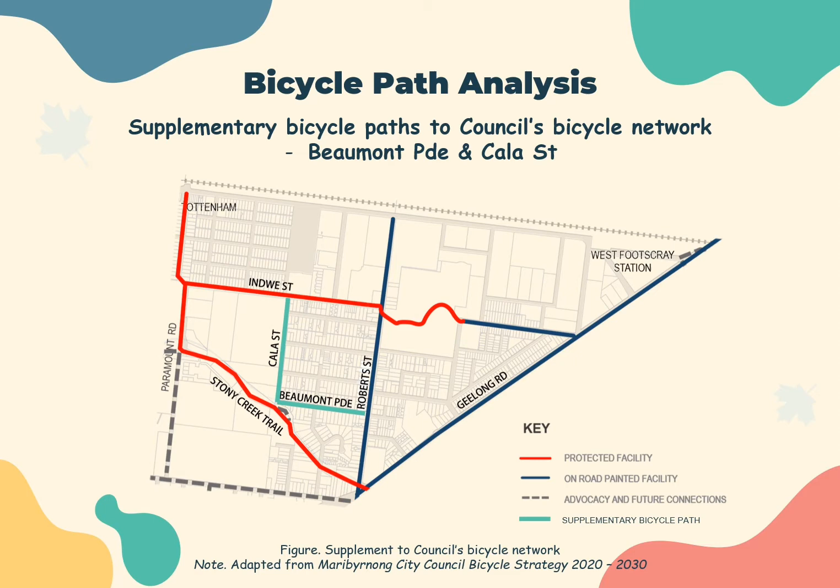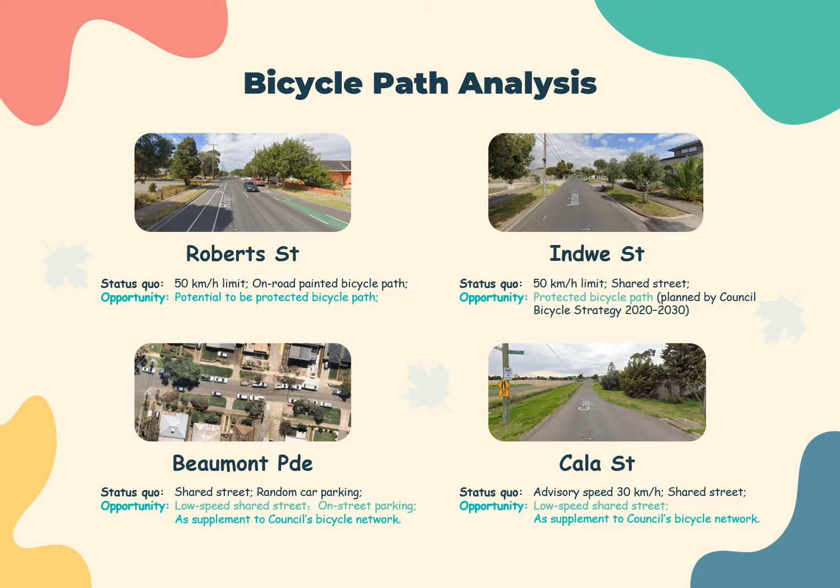This figure presents the Council's bicycle network plan. Since walking is more encouraged on the Stony Creek Trail, we'd like to add 2 bicycle paths, marked as green lines, to the network. Roberts Street and Indwe Street are high speed and high volume, and both can become protected bicycle paths. Beaumont Parade and Cala Street may not be wide enough to set up separate bicycle paths, but can be upgraded to low-speed shared streets as supplementary bicycle paths.

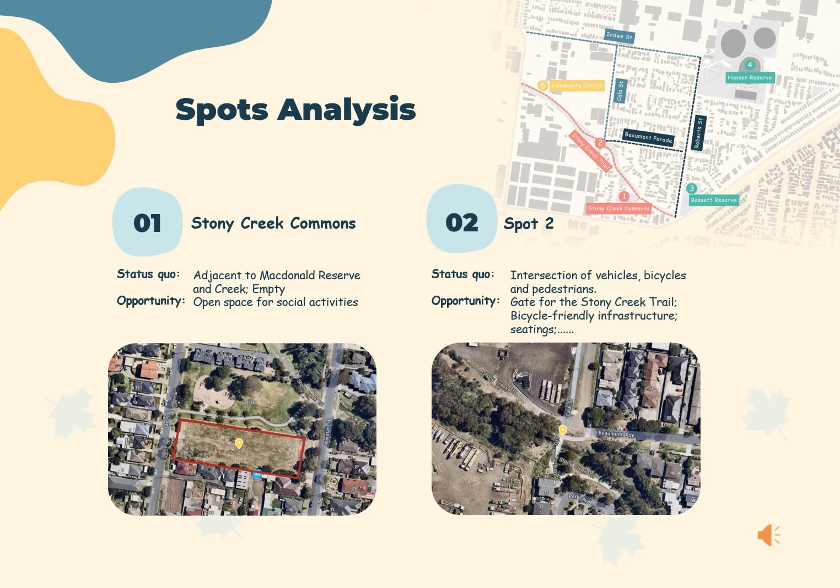According to the community voices that we received, we selected these 5 potential spots to transform. Spot 1 is adjacent to Macdonald Reserve and close to Stony Creek, so we try to use its surrounding resources and transform it into an open space for social activities. Spot 2 is an intersection of vehicles, bicycles, and pedestrians on the Stony Creek Trail. Therefore, it's quite dangerous in terms of transportation, and we are trying to resolve this conflict.

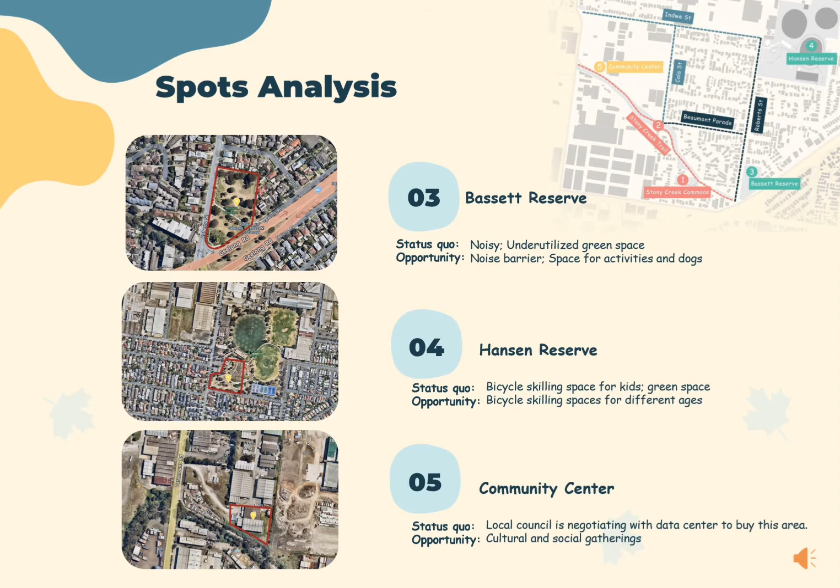As for Bassett Reserve and Hansen Reserve, the underutilized green spaces in these spots have high potential for more social events. Bassett Reserve is currently quite noisy, and the bicycle skilling spaces in Hansen Reserve only serve kids. So we try to apply some strategies to solve these problems. Spot 5 is currently in the area of a data center, and the local council is negotiating with them and wants to buy Spot 5. We try to utilize this area, which is close to the creek, to create more cultural and social gatherings.

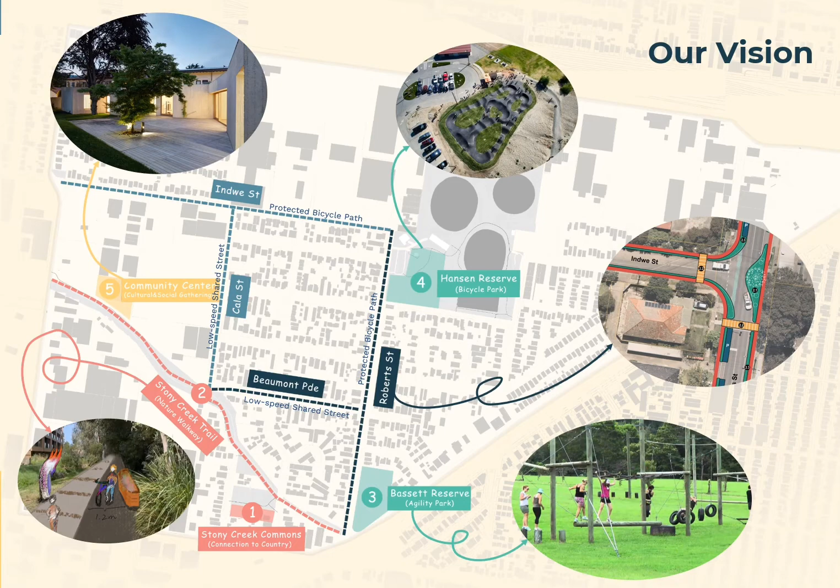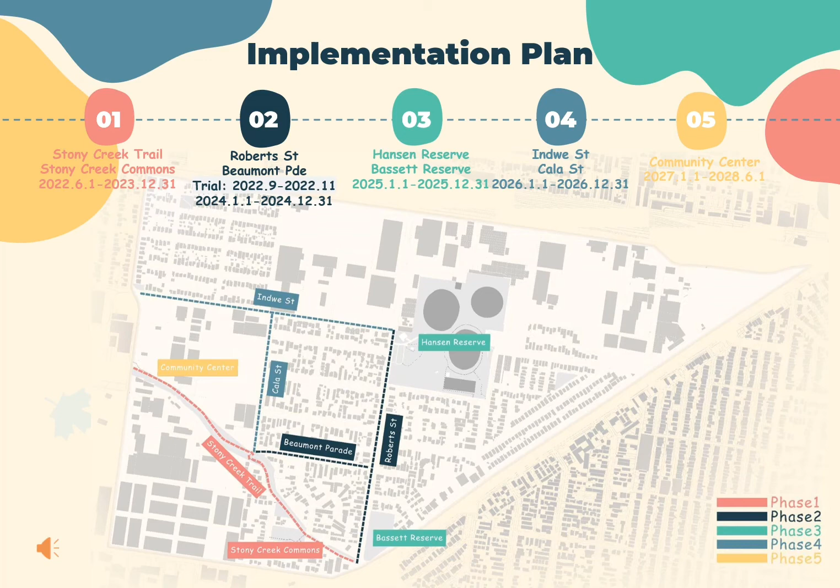This is a future picture for this area. It will become a bicycle-friendly precinct. The Safe Bicycle Network will connect quality amenities to support community communication. People will be encouraged and attracted to engage with the natural and cultural heritage of Stony Creek. Keep this in mind, and later we'll explain them further. In terms of our implementation plan, our project will be divided into 5 phases, and will mainly focus on the first 2 stages. Let's move to phase 1.

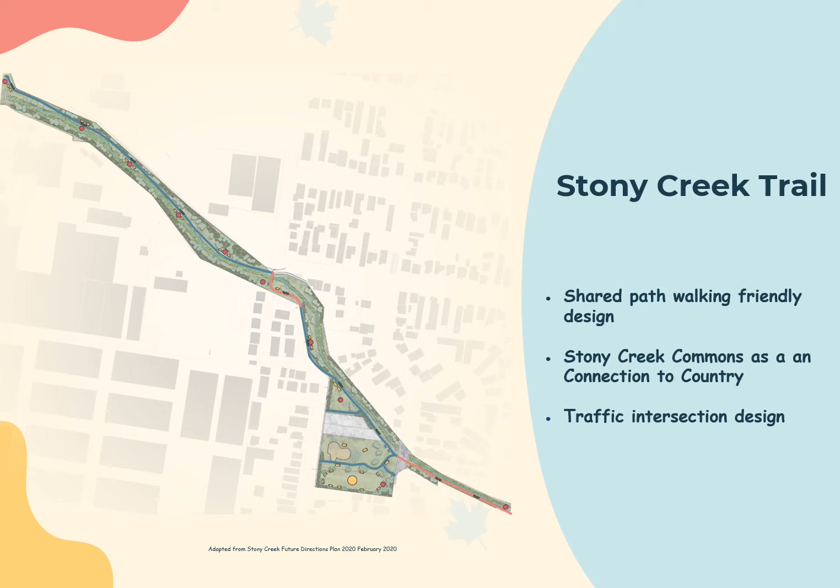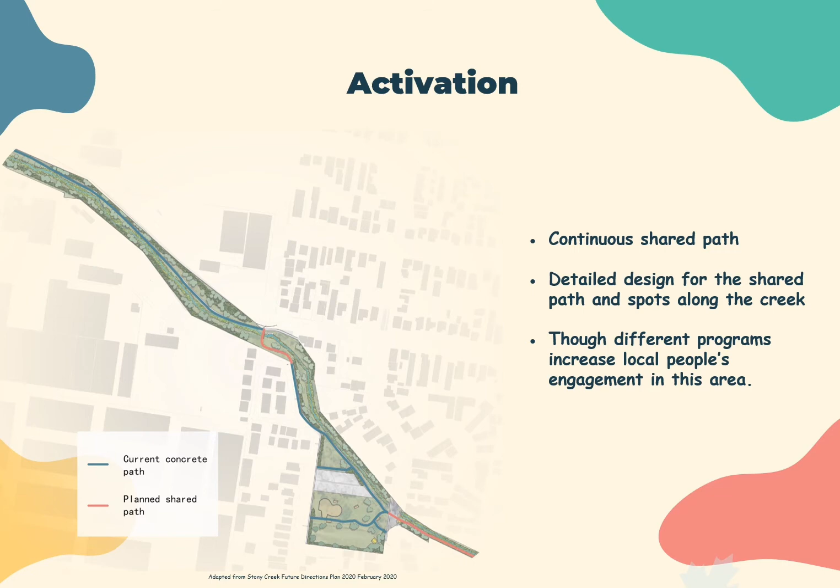So for our first phase, we focus on the activation of the Stony Creek Trail: transform the road into important recreational corridors for local communities and cyclists, and cooperate with the local Indigenous community and residents to jointly design the Stony Creek Commons, the traffic intersection, and some art installations. Through a series of programs and activities that encourage residents and cyclists to participate, the vitality of the continuous Stony Creek corridor will be activated.

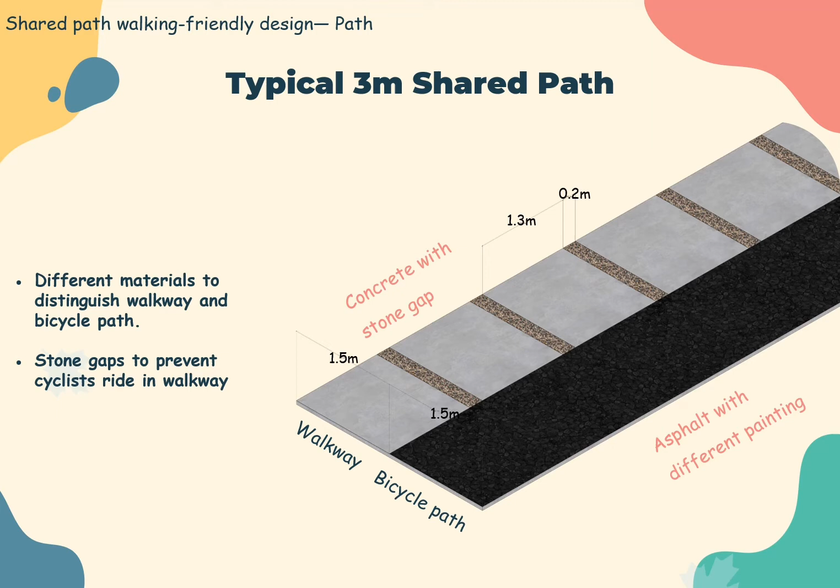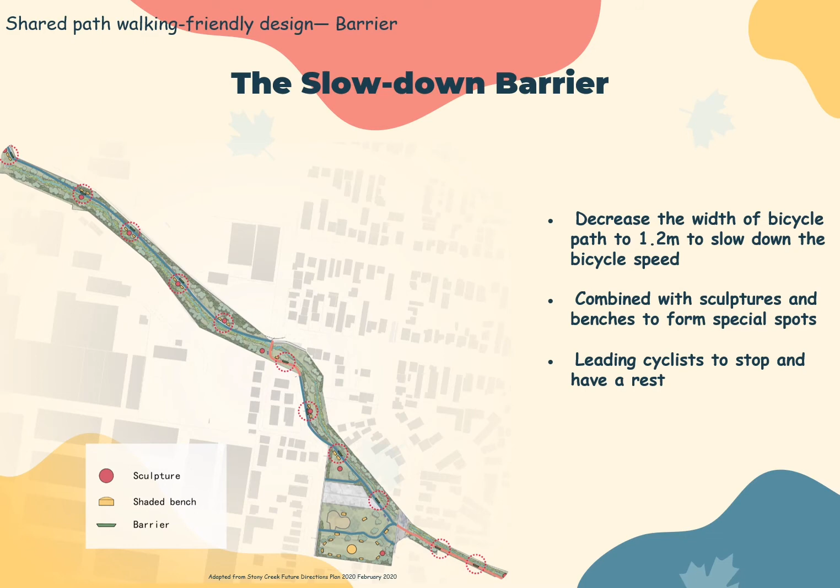The first thing we see is the design of the typical 3-meter wide shared road proposed in Stony Creek. Different materials distinguish the walkway and bicycle paths. Through a continuous stone gap, the aesthetics of the walkway are improved and cyclists will be prevented from occupying the walkway. Then we set inwardly protruding flower beds at a distance of about 70 meters in the bicycle lane to narrow it to 1.2 meters, thereby slowing down bicycles to ensure safety on the road.

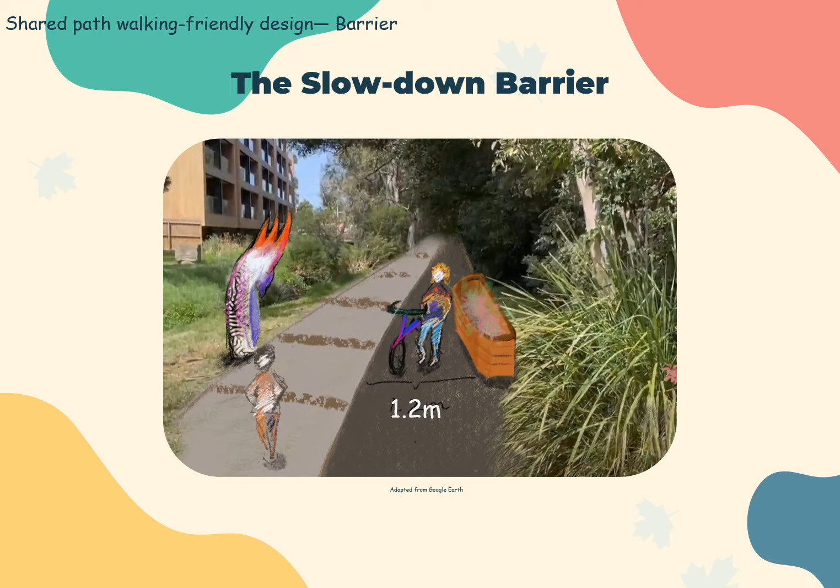At the same time, these flower beds will be set near the newly built sculptures and seats, guiding cyclists to slow down, then stop and take a break here. We planned a program for those sculptures. As an important representative of culture in the creek, we will invite local schools to carry out the creative design of Indigenous culture and invite Indigenous artists to guide.

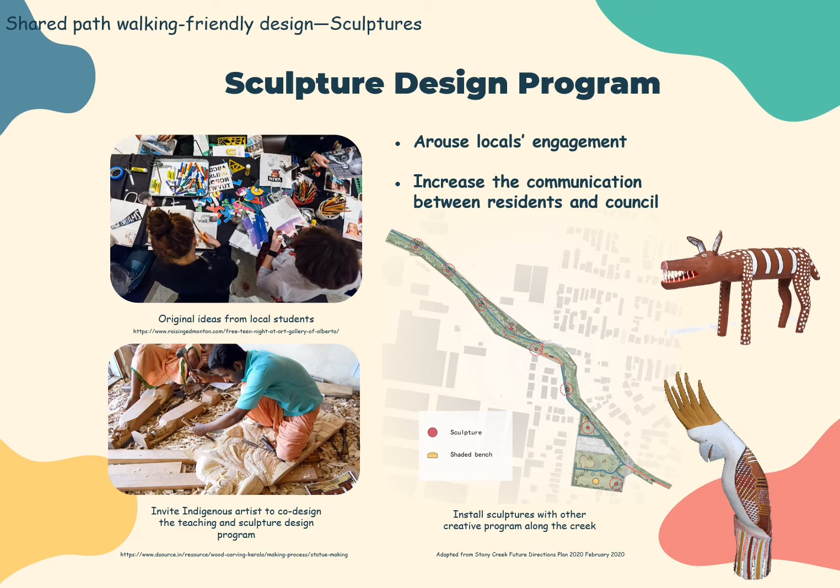Finally, these sculptures are distributed along the creek with other creative programs such as a book exchange box and indigenous art wall and so on.

For the Stony Creek Commons, we will combine it with McDonald Reserve into a large open space. Set up bicycle racks along the road to attract cyclists.

In the center of the Stony Creek Commons, indigenous people will be invited to design the hard pavement of the cultural representatives, which does not affect the integrity of the open space and increases the cultural atmosphere.

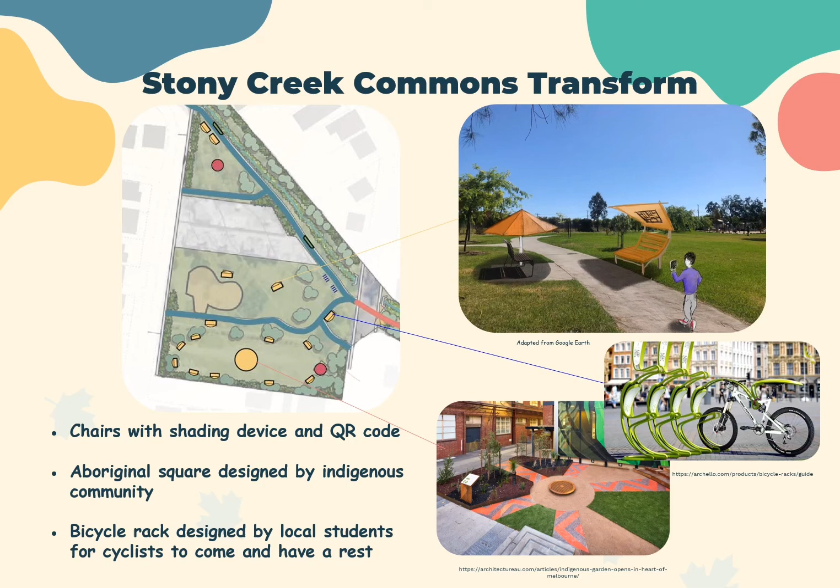At the same time, more chairs with sunshade devices will be added to respond to the voice of the locals. Set up QR codes on the chairs for residents to learn more about the indigenous culture.

For the two traffic intersections along the creek, the first one we designed the speed hump and road painting to slow down the traffic flows and also maintain the continuity of the trail.

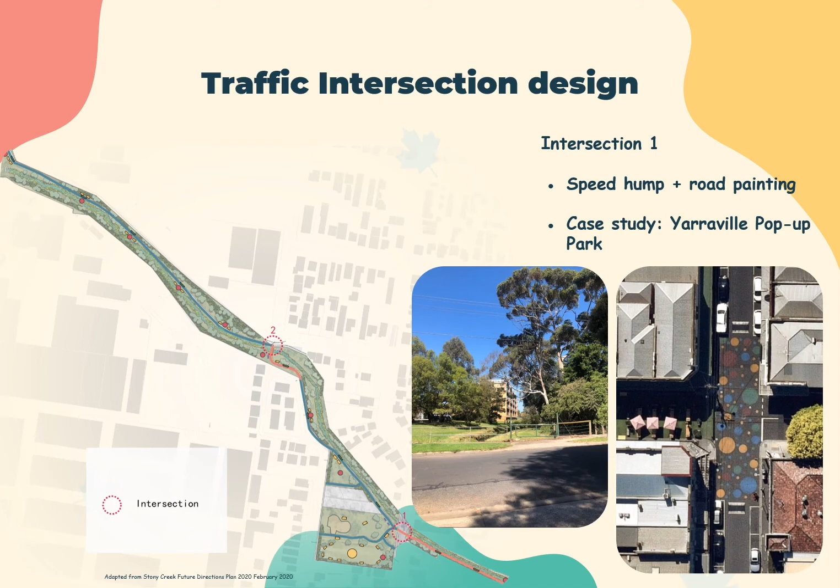The second one, we will invite local residents to design the new iconic gate to separate different traffic flows. At the same time, bicycle rental and racks will be set up for the cyclists.

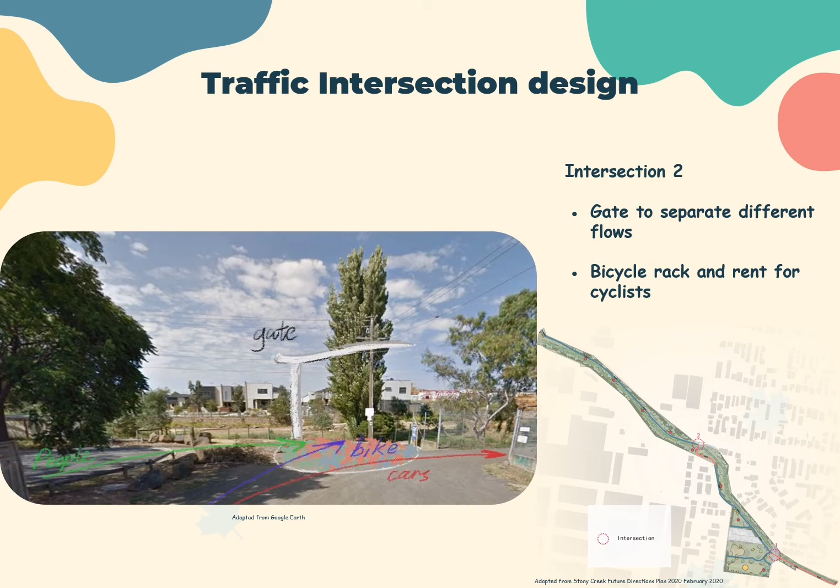Through all the design above, we hope to reshape the cultural and social value of the Stony Creek and make it a center where all groups in the community can participate in design and experience.

Movements in Phase 2 is to upgrade Roberts Street and Beaumont Parade to resolve conflicts between vehicles and bicycles, to improve conditions for bicycle riding.

Lower vehicle speeds, especially below 35 km per hour, have been found to greatly reduce traffic risk. Traffic calming measures used in this phase include chicanes, narrow lanes, speed humps, and raised pedestrian crossings.

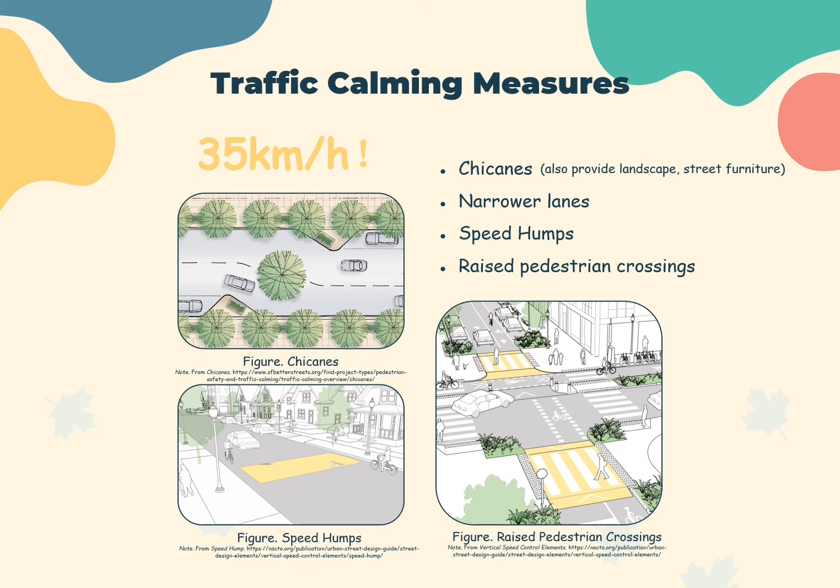Chicanes can force drivers to drive more slowly, and can also provide landscape and street furniture. Narrow lanes tend to lower vehicle speeds as drivers become more aware of risk.

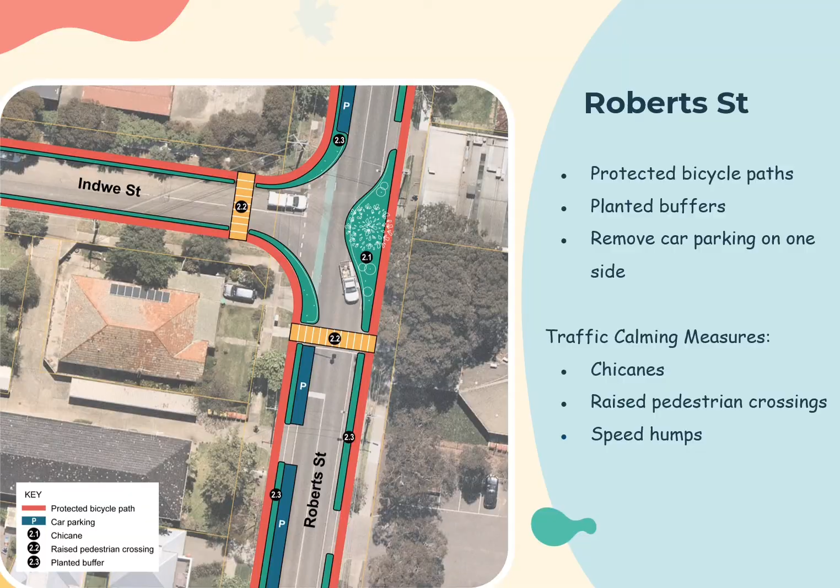Removing car parking on one side makes it feasible to set up planted buffers to offer protection for cyclists.

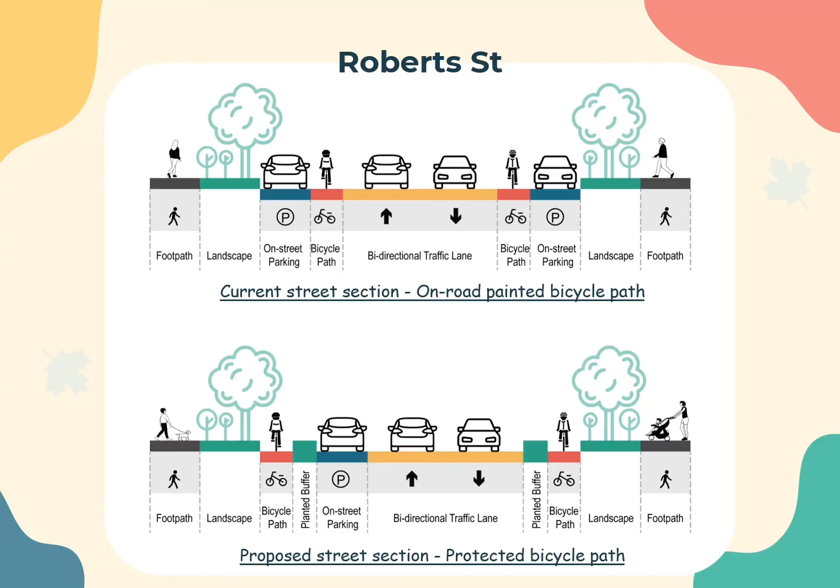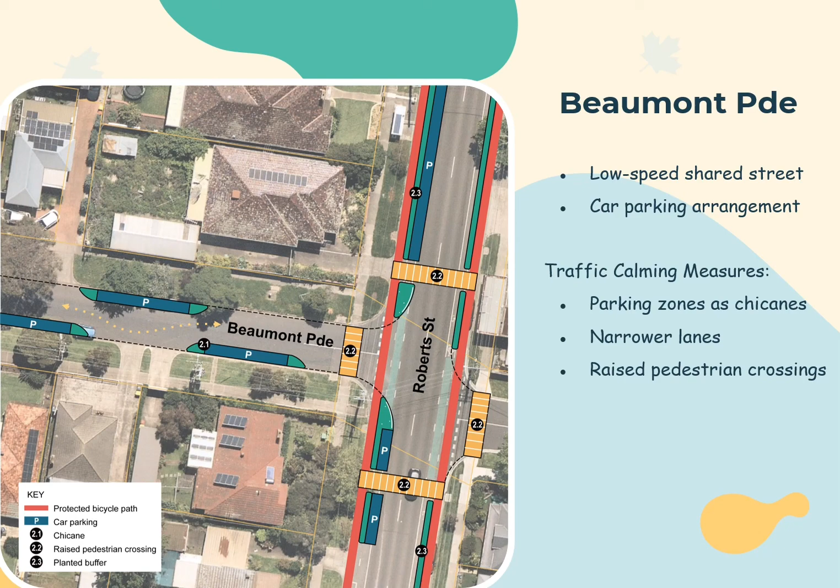On Beaumont Parade, designing parking zones as chicanes, narrow lanes, and raised pedestrian crossings are used to create a low-speed shared street. The arrangement of parking zones not only resolves the problems of random parking on Beaumont Parade, but also makes up for the loss of parking space on Roberts Street.

Pop-up bicycle paths and temporary chicanes will be installed for 3 months as a trial before the final version is constructed.

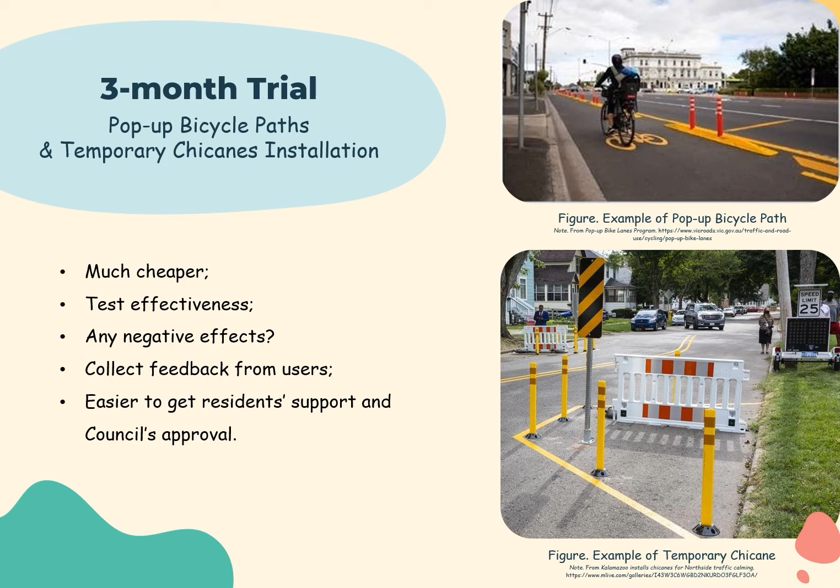It provides an opportunity to test effectiveness, to investigate whether there are any negative effects, and to collect feedback from users. The trial can clearly show both the public and the council what will happen, and makes it easier for the final version to get support and approval.

So now we got to phase 3 to 5, spots to be designed in future. First, in phase 3, Bassett Reserve has been disturbed by noise from Roberts Street and the green space is not contributing to the community.

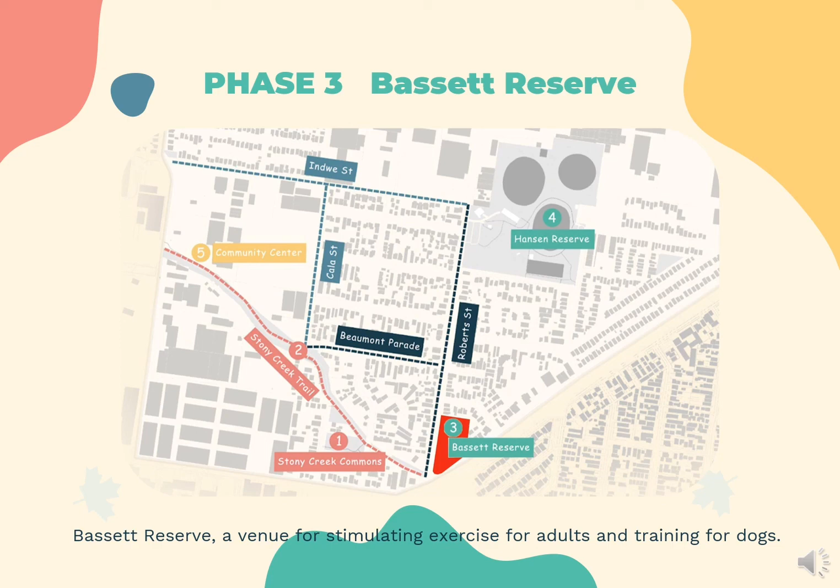So at this phase we plan the following aims: first, complete soundproof walls along the street; an outdoor climbing park for sports enthusiasts; and lastly, an agility park for families with dogs.

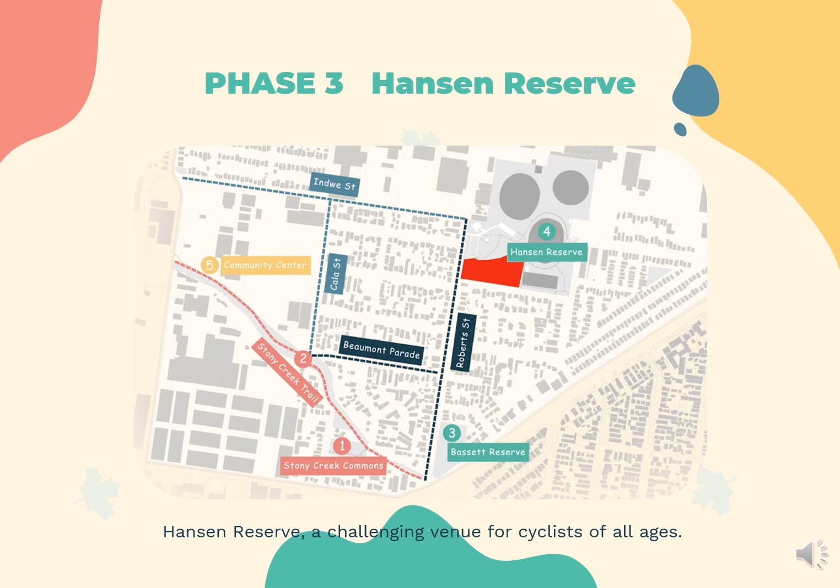What's more, in phase 3 the original children's cycling park in Hansen Reserve will be expanded into a bicycle practice area suitable for all ages.